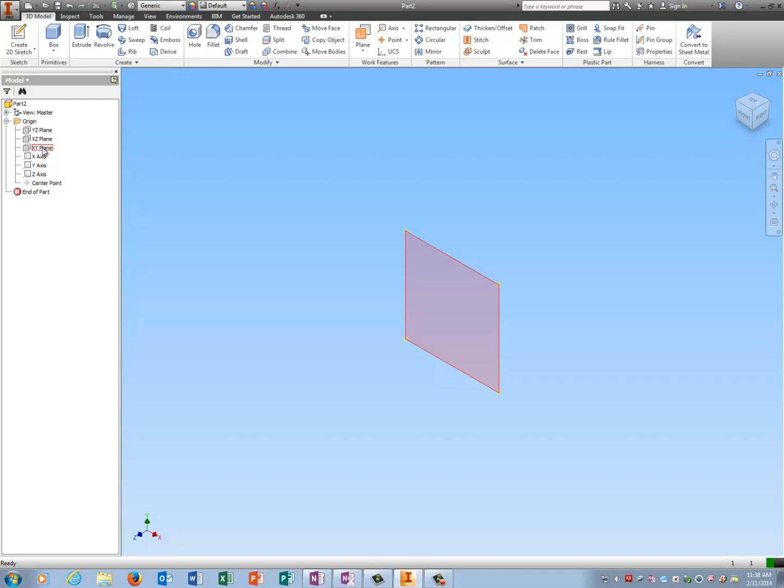Okay guys, this is the Cowcatcher, so I'm going to go to Origin, go Home, and pick a plane to draw on. I'm going to draw on the top plane for no better reason than I feel like it. And in looking at the Cowcatcher, I see a shape that kind of looks like home plate.

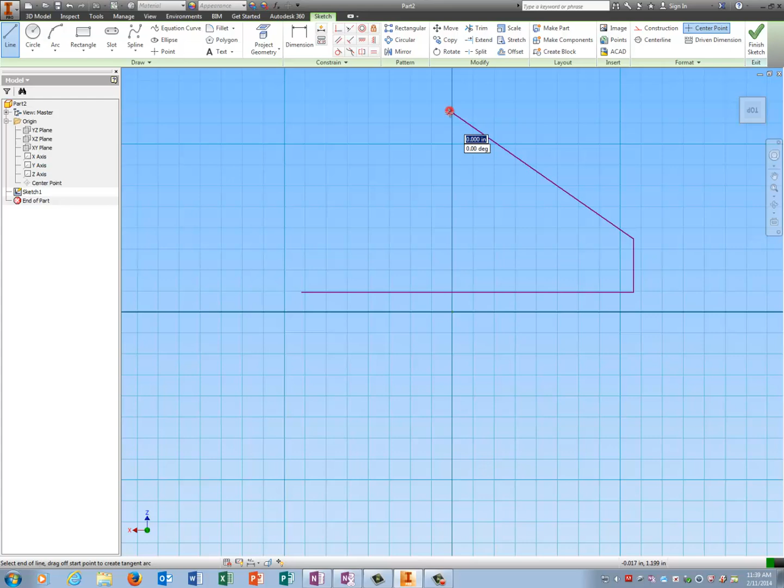What I'm going to do is sketch the larger one, which is the bottom, and then offset with a plane and use a loft. Loft is an exception to the rules. Remember, I told you that you can't have more than one sketch active. Well, that's not really true - you can. When you're working an extrude, it's not good for you, but when you're doing a loft, sweep, or coil, you need to.

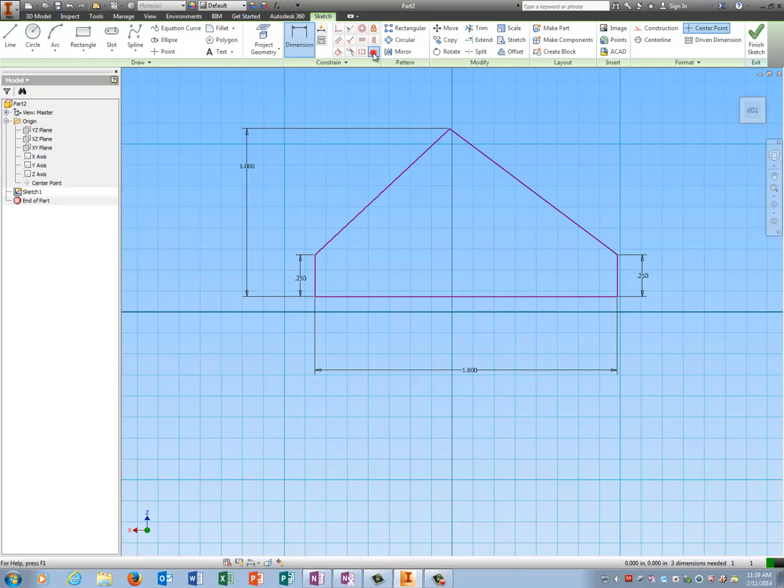So this line here is 1.8. The height is going to be... 1. These things here are 0.25. And to make the angled sides equal, click equals, click them, and they straighten themselves out.

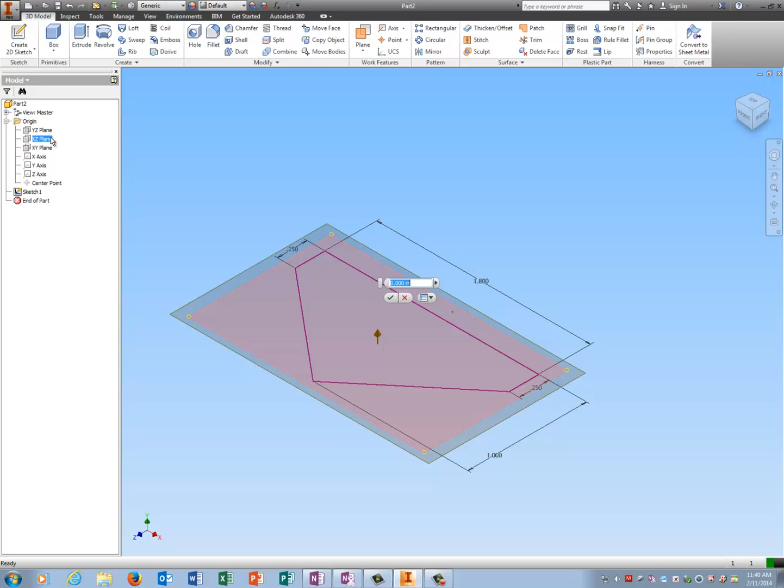Finish the sketch, go to Plane, Offset from Plane, and pick the plane you just drew on - for me it was XZ. Now it's asking how far above this plane you want the new plane, so that's going to be 0.75 because that's the height of the Cowcatcher. Now I have this plane floating above my bottom sketch, 0.75.

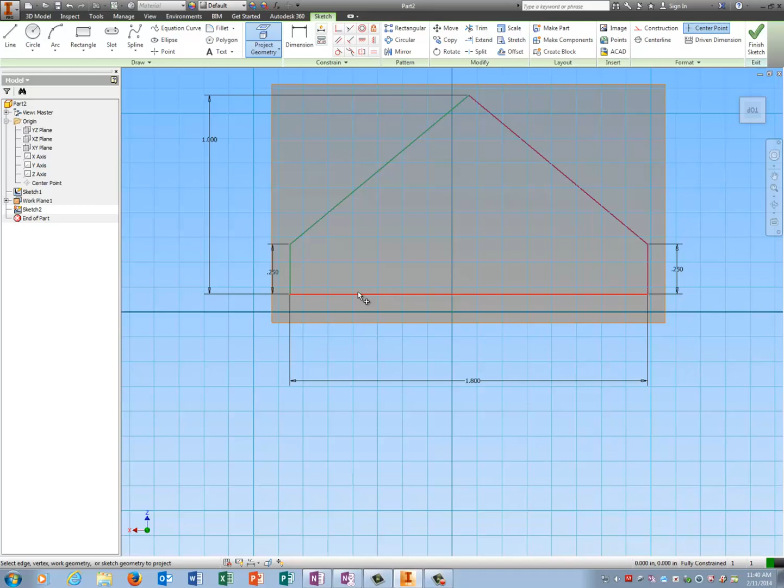So I'm going to click Create 2D Sketch, catch the corner, and now use Project Geometry. I'm going to project all of these lines so I can measure them, because remember, they are hovering above my drawing, 0.75.

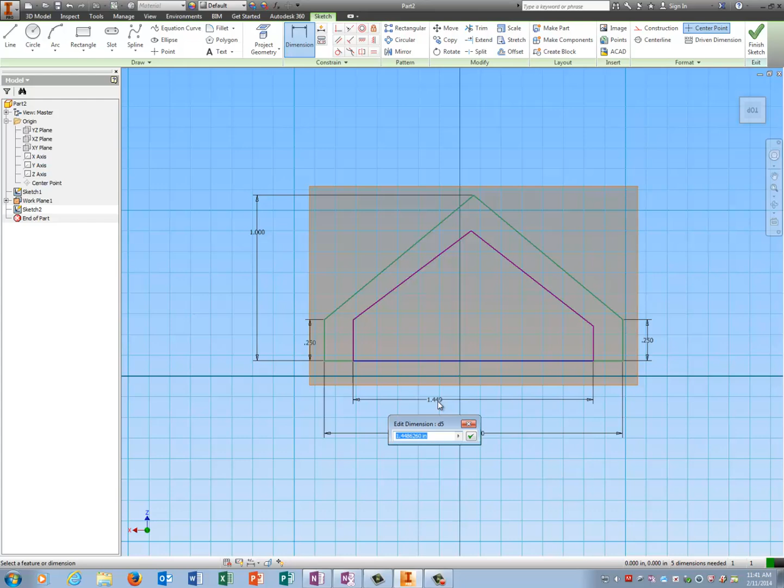I'm now going to draw the smaller home plate, which is the one on top, and keep in mind that they share a back line. This line here, I'm going to dimension to 1.2, and I got that dimension from the very first drawing of the Cowcatcher.

These are 0.25, 0.25. The height of the smaller one is 0.75. So I'm going to click equals and click these two things, and they're going to equal themselves out.

Now I have a problem because they don't line up. So 1.8 minus 1.2 is 0.6. 0.6 divided by 2 because it's got to be equal on both sides. And there you go, now it's in the right spot.

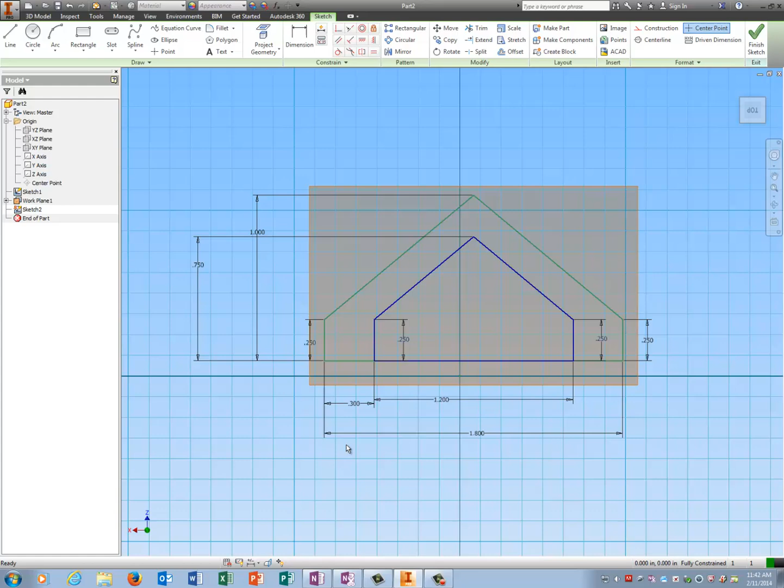Click Finish Sketch, click Loft. Pick the guy on top, pick the profile you want, which is the inside one. Over here, click to add, click the bottom one, and there is your Cowcatcher.

You'll know if you did this right because if you click Create 2D Sketch, it will let you select these two front panels as a sketch plane. If you cannot put a sketch here, you did it wrong. My suggestion is open up the loft, right click on Sketch 2, and make sure you set the height because that's the thing people forget the most.

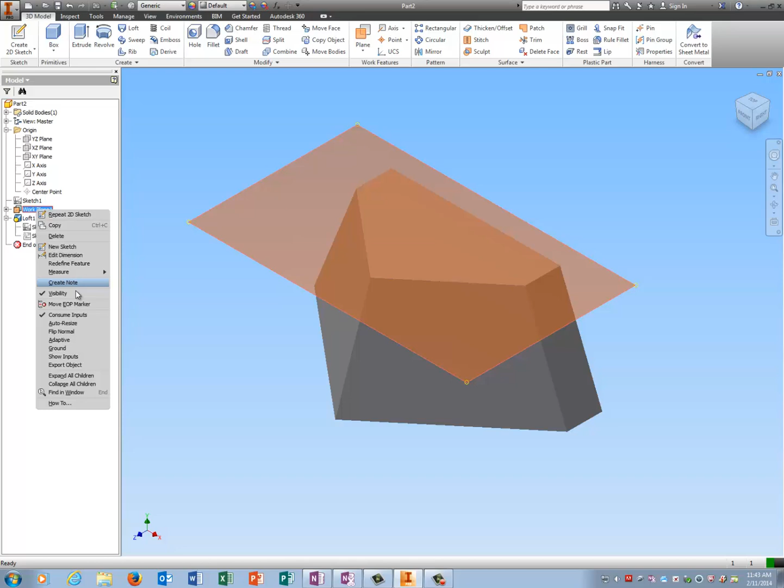I'm going to turn off my work plane, turn off the visibility, and now I'm going to shell this. I click on Shell, and it tells me that shell is 0.1. Make sure it says Remove Faces and tell it OK. And now it has shelled it.

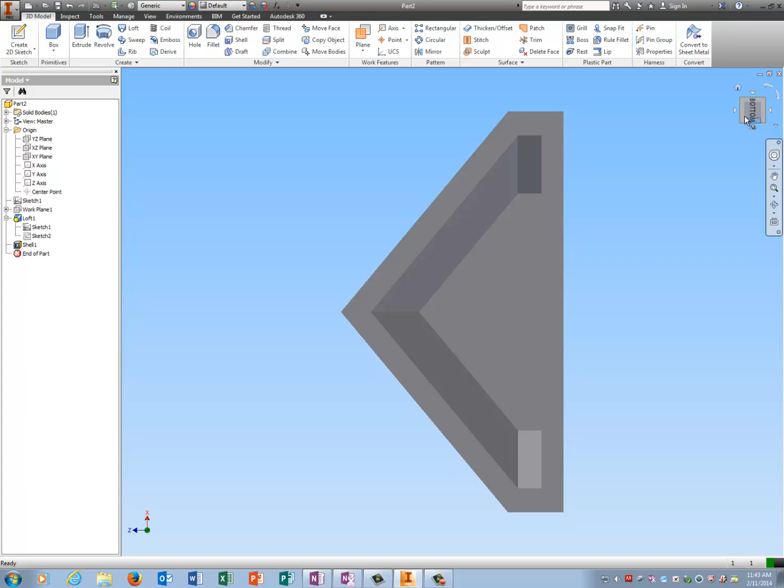The reason I knew to use 0.1 is if you look in the drawing on the part where there's a section view, it says 0.1 TYP. Remember, TYP means typical, so all the way around, the thing is 0.1 thick.

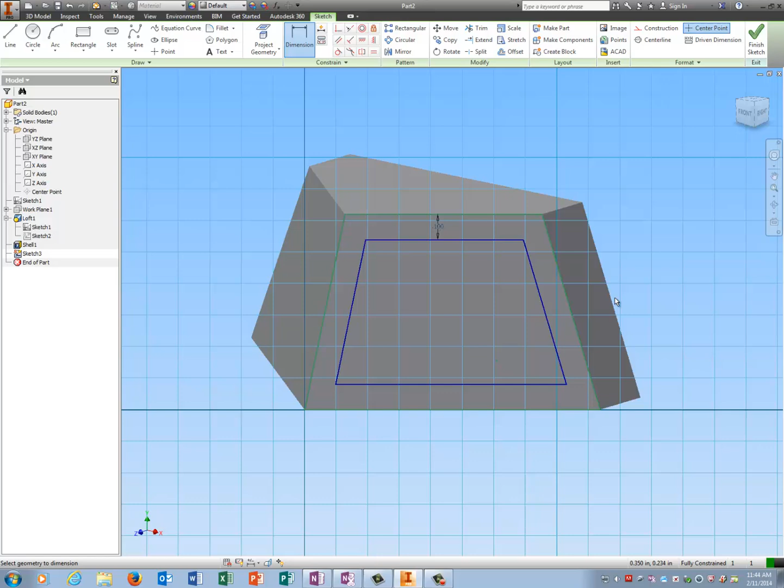I'm going to create a 2D sketch here, and I'm going to make that little decoration. I can do that by using offset, which will take these lines and copy them, so I don't have to redraw them. Dimension here tells me it's 0.1 TYP, which means they're all the same, so that's awesome because offset makes them all the same. Finish the sketch, extrude with a cut.

0.05. And the depth is there also on the sectioned view of the Cowcatcher.

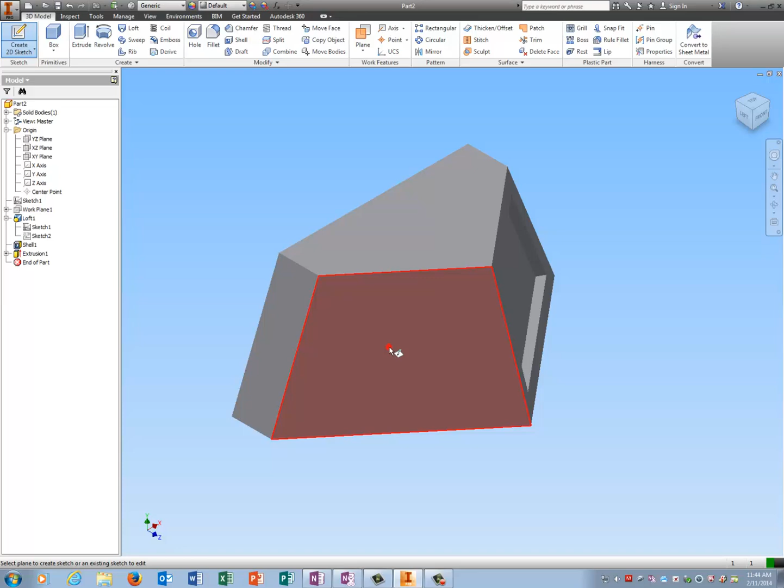Do the same thing on this side: click the surface, offset, click the line, dimension between the two lines, finish the sketch, extrude with a cut.

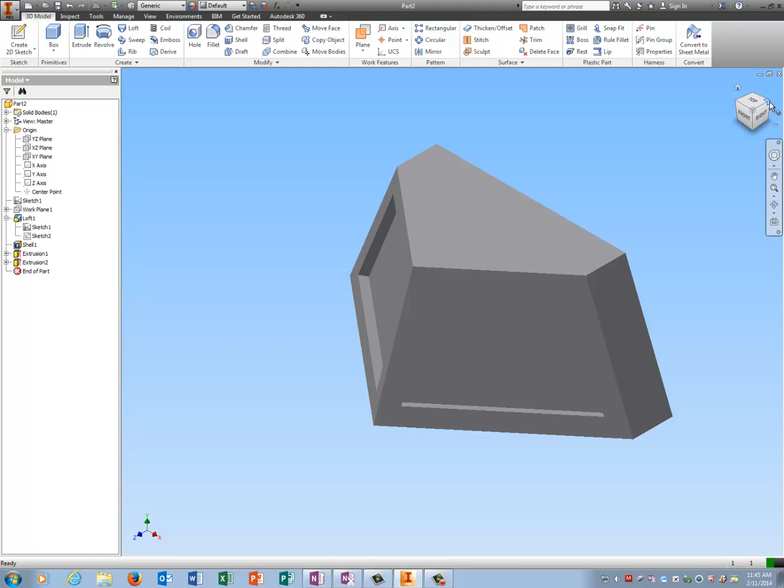Okay, so we're almost done. Now we need to do the pegs on the back. Do a sketch, sketch 3 circles.

Dimension this - it's going to be 0.125, and I found that in the sectioned view, it's kind of hidden. Click equals, click this guy, click the other 2 circles, and they all become the same size.

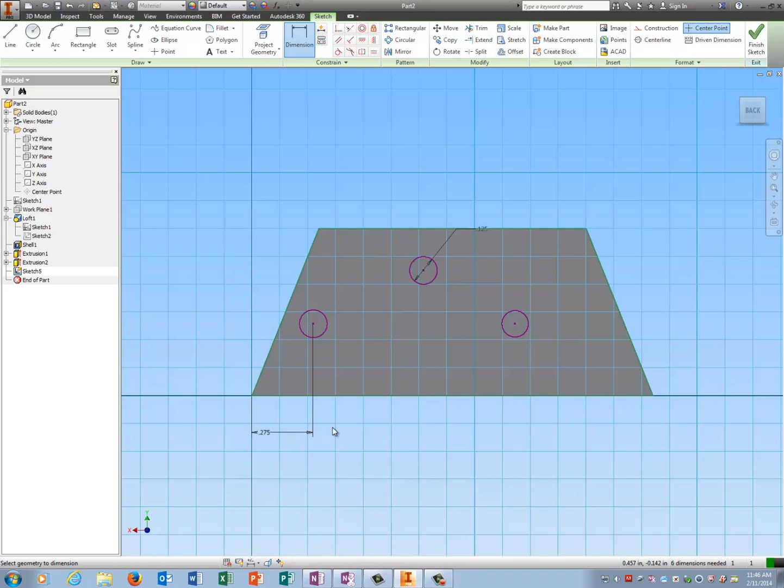To put them where they belong: this guy right here is 0.275, and he is 0.125 up. From here to here is 0.625, and he is 0.625 up. And then this guy over here, it's actually measured from the center of that circle, is going to be 1.25 and also 0.125 up.

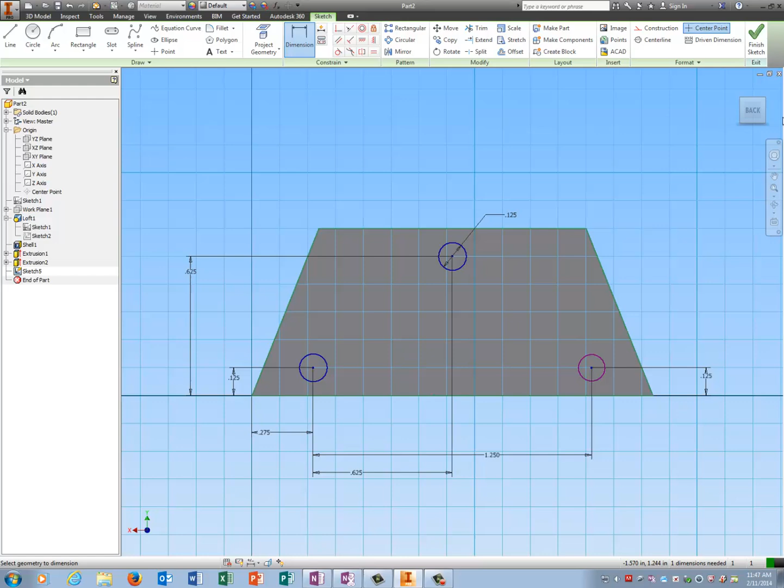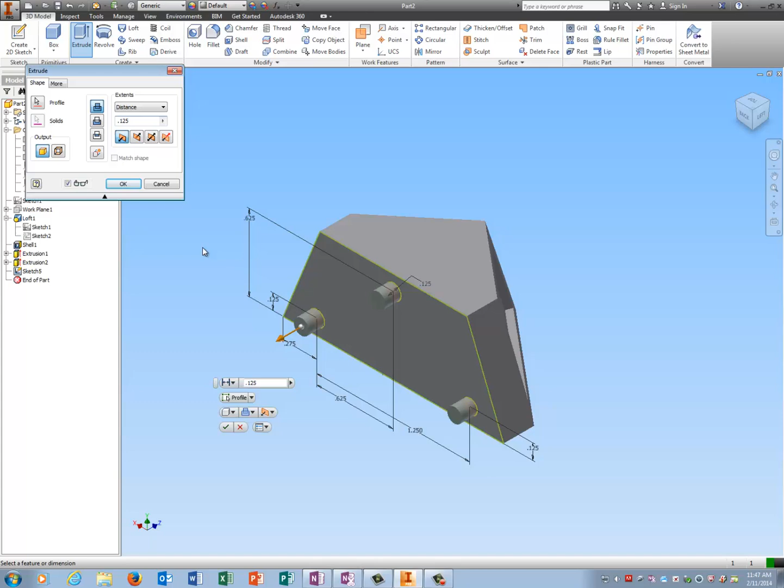I'm going to finish the sketch, and extrude my little circles. These circles are going to be 0.125, which is 1/8 of an inch, and you can also find that in the sectioned view - you'll see TYP again, 0.125 TYP. Again, typical means if it looks the same, it is the same.

The last step on the Cowcatcher is the little chamfer on the back of the pegs. Click on chamfer, change the distance to 0.01. Remember, chamfer is just a little edge. So you just click the 3 circles after you put in the value, and there you go.

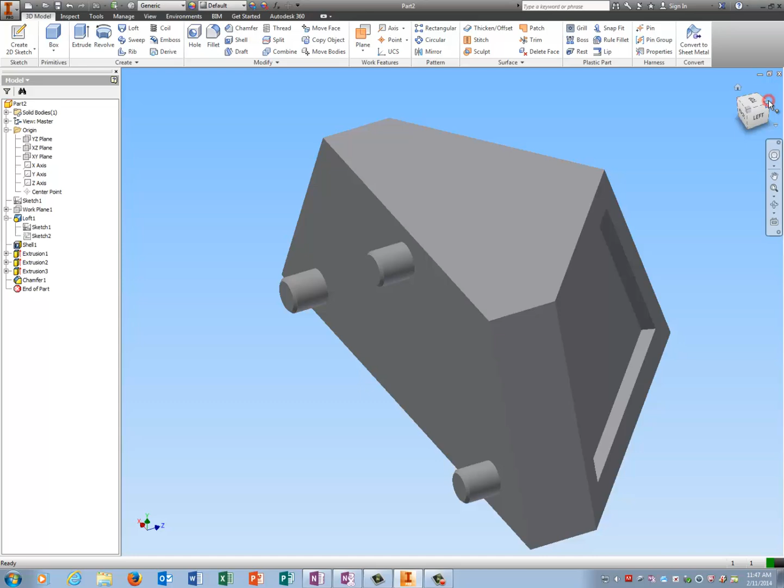So there's your Cowcatcher, guys. Make sure you put colors on it and save it.